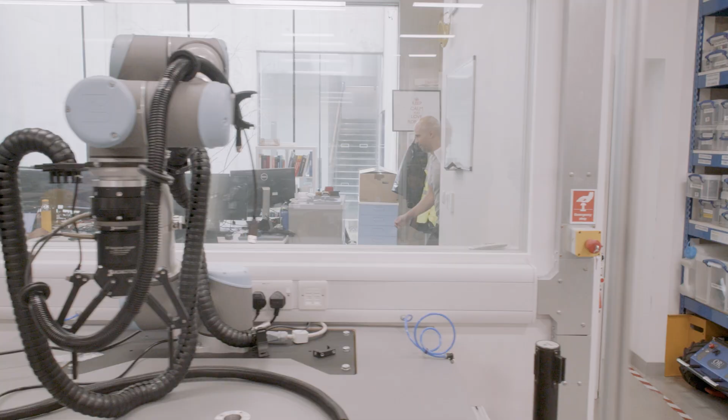Welcome to this next episode of Fire and Wire. I'm here on the Banbury Road. I've got this beautiful old building behind me, and you wouldn't believe it, despite its age, inside is the high-tech Robotics Institute.

We're going to go and find out a little bit more about what they've been doing to drive and make robots for good. This is the team which just recently won the Queen's Anniversary Prize for their brilliance in all things robotics. So let's go on in and find out a little bit more from the director of the Institute, Professor Nick Hawes.

Great to have you here. Oh, well, I'm absolutely thrilled. Thank you so much. We got lucky with the weather. Just about. And I know you've got a real treat for us in store.

So, Nick, maybe we could just kick off by telling a little bit about yourself and your background, and then your role here, and a little bit about the history of the Robotics Institute. Yeah, I'm a Professor of AI and Robotics in the Engineering Department. I'm also a tutorial fellow at Pembroke College, but I'm here as the Director of the Robotics Institute. The Institute was founded by Paul Newman and Ingmar Posner about seven years ago, building on their history.

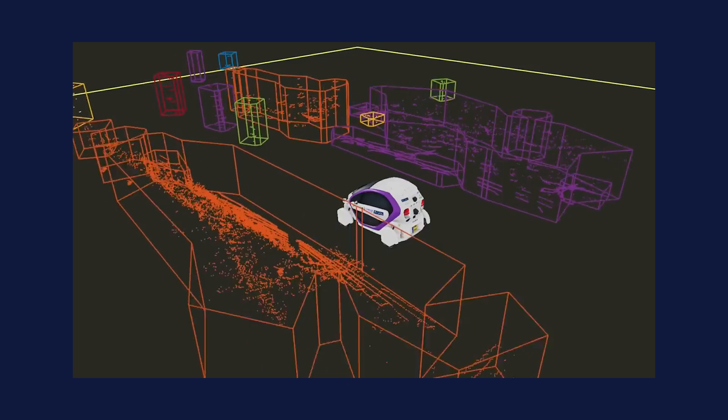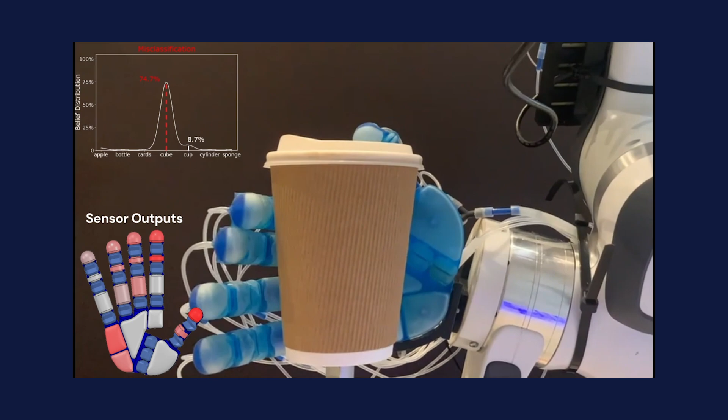The foundational work for autonomous driving, that was what Oxford was known for in the noughties, kind of 2010s. Then in 2017, the Robotics Institute was founded based on the back of the success of Ingmar and Paul. That's commercial now, that's gone off into Oxa, which is Paul and Ingmar's company. And now we do every other type of robot you can think of. We do legs, we do hands, we do wheels, we do a bit of drones, we do human-robot interaction, we do ethics. All of this is underpinned by artificial intelligence and engineering.

And it was for the breadth of it that you won the Queen's Anniversary Prize. So congrats once again. Thank you very much, it was awesome to go to Buckingham Palace that day. The whole Queen's Anniversary Prize system is looking for the societal impact of research. So whilst they awarded us for the quality of the research, they looked at the kind of impact we had on transport, on robotics in nuclear, on space, and increasingly on things like social care. These are areas where robotics can have a huge value, as well as just the sheer fun of playing with robots, which we all love.

I mean, that's what the best research is, isn't it? It's both excellent science, but fun as well. We all do it for the love. Yeah. Well, I think it's time we saw some robots. So here we go.

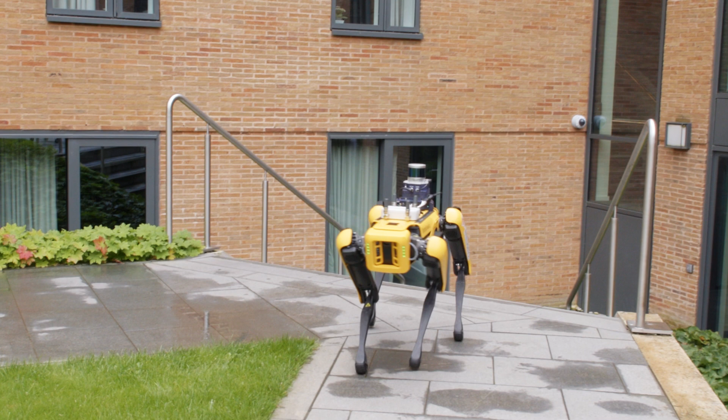You should hear the robot start to move. This is a Spot, it's a Boston Dynamics robot. One of the things we do here a lot is, you can hear it, we buy a lot of our robots and then use them as platforms to deploy artificial intelligence for decision making, perception, and then use them for applications.

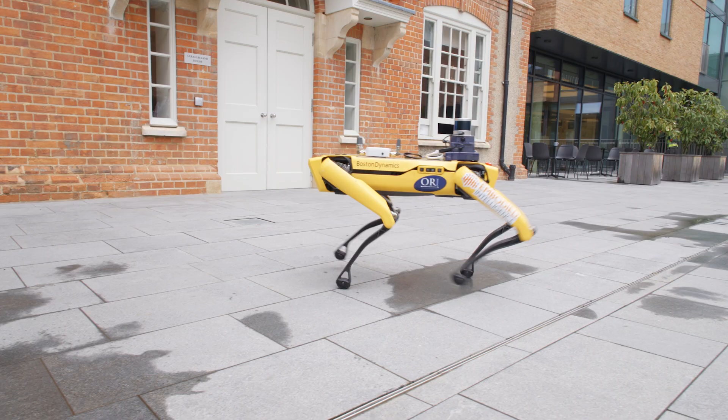And so here it's just doing an inspection action, pointing its cameras up to a target that we've proposed. I'm just going to get out of the way so you can see. Absolutely, let him come through. Yeah, him, I don't know why I'm saying it's... to not... him. We don't gender Spot robots. We shouldn't gender them.

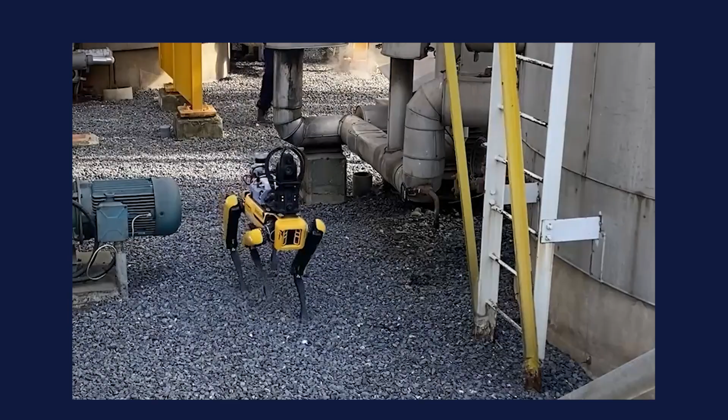We've been doing work with the UK Atomic Energy Authority to do inspections, so in areas where you want robots to be, but you don't want humans. Then these robots are excellent for that.

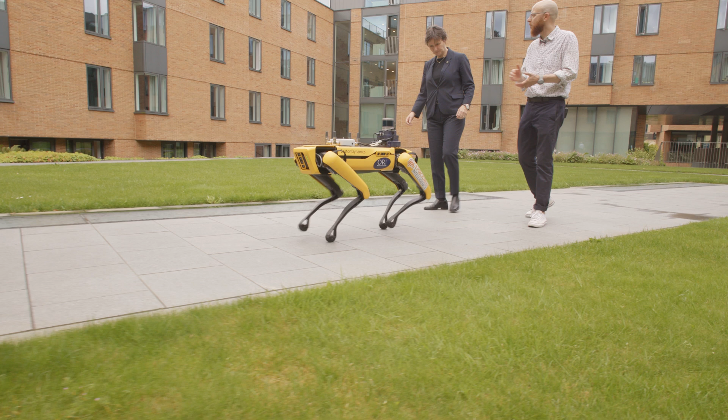Was it deliberately made for that low movement? I think it just gives it more flexibility. Yeah, I think it's just about, it gives it more control, more flexibility. So it can rise and... Yeah, so it can lift up higher, it can go down.

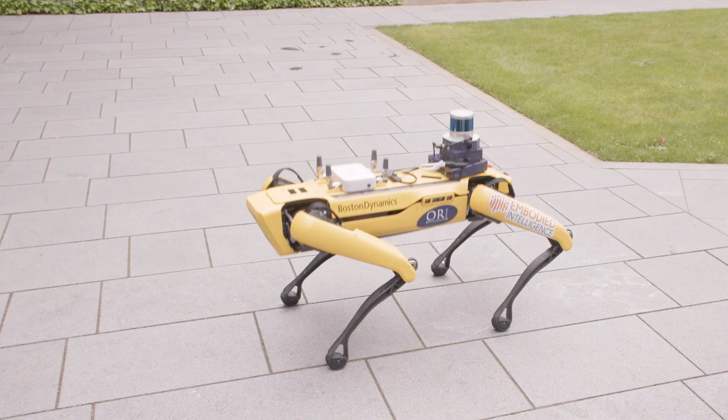We're deploying it under a nuclear reactor by the end of the year, where it's going to crawl through what's called a bioshield, a small tunnel. So it's going to be as low as possible, crawl through, then go up and inspect around the bottom of this reactor. Take pictures and everything, and build a 3D map that they're going to use as part of the decommissioning process.

It also saves money, so that decommissioning process, the mapping under this reactor, will cost over £1 million if you did it by hand, or with humans. But we can do it for tens or hundreds of thousands of pounds with the robot and the project. So when you see Spots at science fairs or at trade shows, you need to look at what's on the back.

If there's nothing on the back, then they've just used it for dancing - it's just a gimmick. But if they've got a payload, cameras, or LiDARs, then they're actually being used in reality. You can also see what weight it can take.

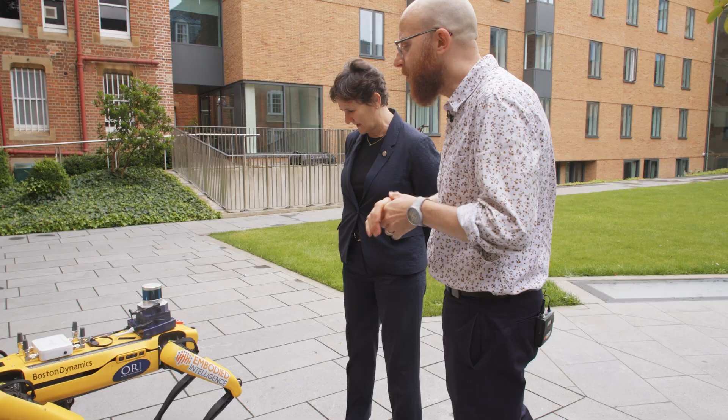I don't know, I couldn't sit on it. You couldn't sit on it? No, our risk assessment doesn't allow that - I've been in so much trouble. But you can also see the bumps and bruises where it slipped downstairs or turned over. They're really robust, fantastic.

Right, well, let's go on and see some more. Bye, Spot. You should get it to talk.

People behave completely differently when a robot speaks. It's really, really interesting. I think people react very differently.

This is down to the lab - you've got to tell me why you are calling it the Bat Lab. It's underground, like Batman's lab, and it's full of exciting technology. There's nothing too deep about it. So you're the Batman, and who's Robin? You can pick today. Okay, you can pick a Robin. Good, I will.

Oh hello everyone. Wow, oh my God, this really is like a bat cave. My colleague, Professor Irene Tracey. Yeah, I know Ingmar, of course. Professor, good to see you again. Thank you for letting me come and visit. Welcome to the ORI, welcome to our lab in the HB Allen Centre.

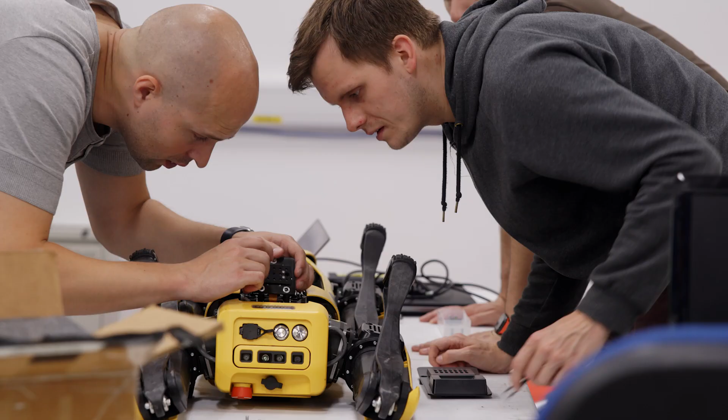In the ORI, most of the science we do is pulled through applications, and that's really important because it focuses our research. We're also very keen on engaging early with stakeholders, particularly in social care, because you don't want to be the guy who shows up with the autonomous pill dispenser that nobody needs. Turns out one of the key causes of hospitalization out of care homes is not drinking enough water, so one of the things we had in mind was to automate that system with some fairly basic robotic science. That was the birth of what we now call the Good Hydration Project.

This is one of those robots, one of the stretch robots manufactured by a company called Hello Robot. It's very basic - you don't see a face, you don't see anything human-like, because ultimately you're supposed to think of this as a tool, a functional tool. If you think about taking a large language model like ChatGPT, with vision input and so on, onto one of those robots, you want to interact with these robots with pure language.

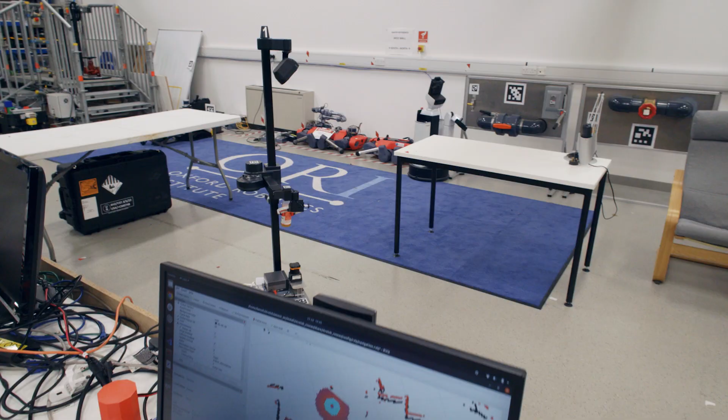Say I don't want an orange, I want an apple juice, for example. The language model knows about language, but it doesn't know anything about the robot workspace. So grounding all these things - like I want this bottle in the robot workspace - and also the robot embodiment, how to interact with it, is a pretty critical thing for us. We're hoping to get this into a care home in the next few months as a first trial.

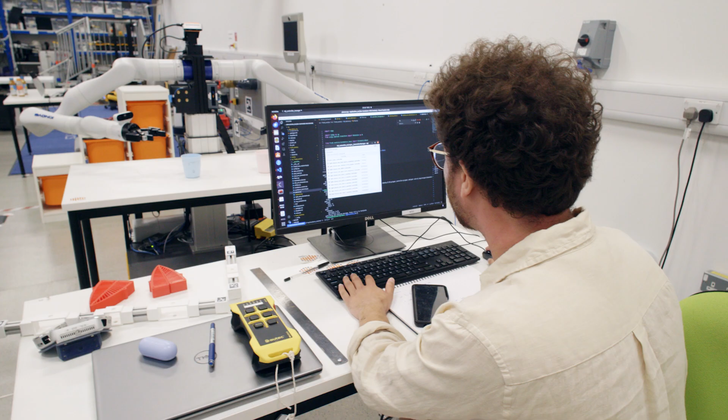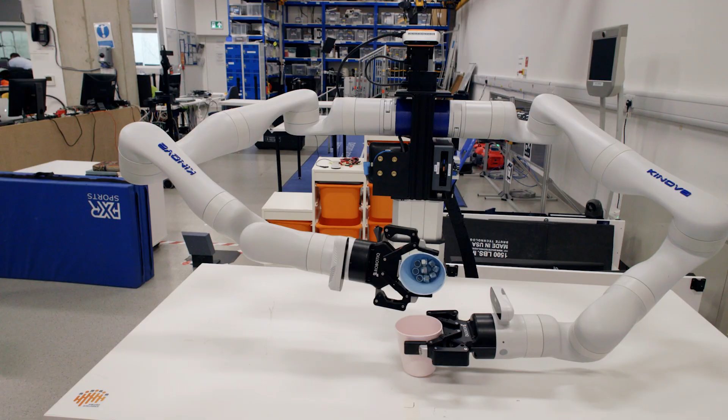I'll take you to this guy - this is Frank. Hello, Frank. Frank rolled out of a crate about 8 months ago, and we've been commissioning it ever since. This is the last stage of commissioning before we do the research bit. The idea for this is to really work on small batch manufacturing and assembly - there's a lot of work going on in the robotics community right now about manipulation and how we do that robustly.

This is Alex - hi Alex, good to meet you. Alex has done a lot of the integration for Frank and the software framework for it. We changed the controller, so rather than being very rigid like most manipulators, it's actually quite soft and pliable, so you can have a play and push different joints. If it was interacting with you, it's not going to harm you - it's very soft and compliant, not going to punch you in the face.

We'll do another thing as well, which is really cool - it actually understands a little bit about itself. So if we rerun this, it'll try to do a similar thing where it tries to pour from one hand to another.

But I can be a bit of a bully, you see, and it will try and react to it. So I can sort of move it around very gently. And the other one's chasing it.

Exactly. And then if you'd like to have a go yourself. I would love to have a go. Pull towards yourself. I will. Yeah. Oh yeah. And then this arm will gently follow you. And then if you bring it towards me again. Yeah, sorry, it's a bit... let me give you a... yeah.

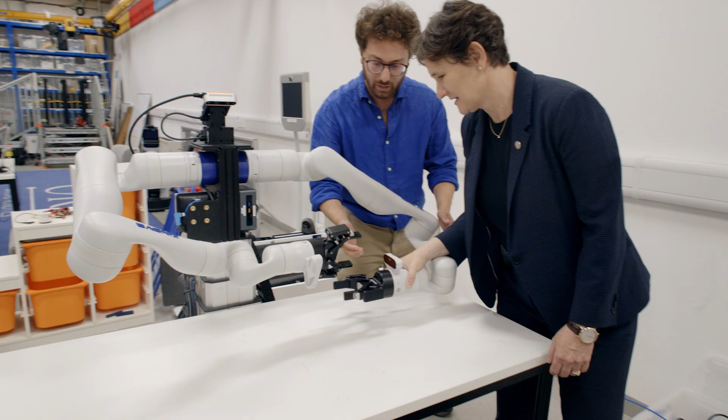Gosh. And you were saying you can show it doing some sort of more complex assembly. Yeah, I mean, that cup thing was pretty impressive, but let's have a look at what else it can do. Okay, sounds good.

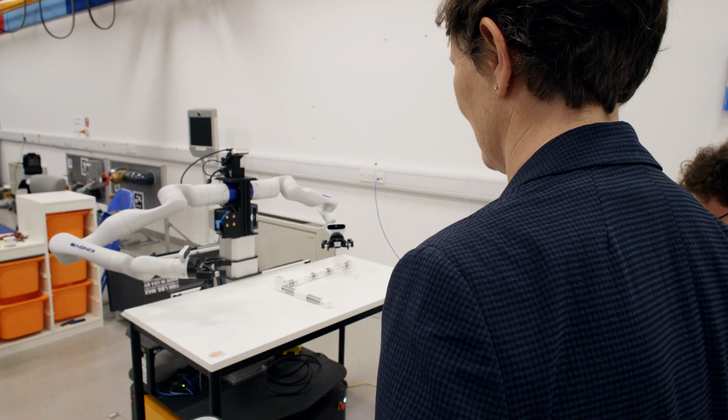A few seconds, sorry, bear with me. Okay, I've got every confidence in Frank. Here we go, right, let's just see how it goes to start with. Doing a very good job. Oh, I did it. Yeah, I did a great job. Sorry, now less surprised when it does that. You have no faith in Frank. You've got to trust Frank. Yeah, really, I should trust.

I was watching a documentary on agriculture, and they had this amazing robot going along picking strawberries with incredible precision. Frank's done well, but this looks like it wouldn't be as good as that robot at picking strawberries, but that's not the point. We tend to develop technology here that embeds into its workspace.

So, for example, if you have a particular product that you want to build today, and you only want to make a small number of that, hence the small batch part, you want to instruct your robot in a fairly natural, organic way in order to be able to give it new skills so it can do new things. That strawberry picker wouldn't be able to do anything else but pick strawberries, and a particular type of strawberry typically, and that's it.

Whereas this robot could be trained to do the strawberry, but it could also be trained to pick a pear or an apple, or build things. That's the difference. Yeah, and of course it's not tied to that robot. So if you happen to be a small batch manufacturer, or you do something in industrial assembly, you don't have to have bimanual Frank. It can be a single arm, it can be two arms, it can be more than that.

Right, okay. And so the question then is, of the principles, how can somebody who's not a roboticist go in and say, well, actually, I need to be able to do this quickly.

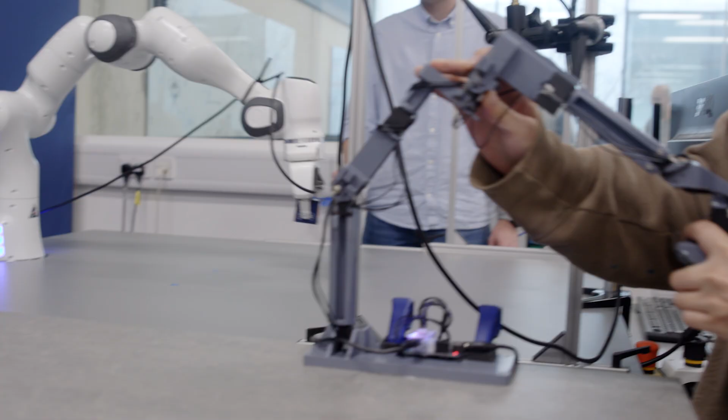Let me now introduce you to my colleague Perla Maiolino. Good to see you again. Good to see you again.

Yeah, I can see you've got a patient here in some pajamas. Yeah, what on earth is this all about?

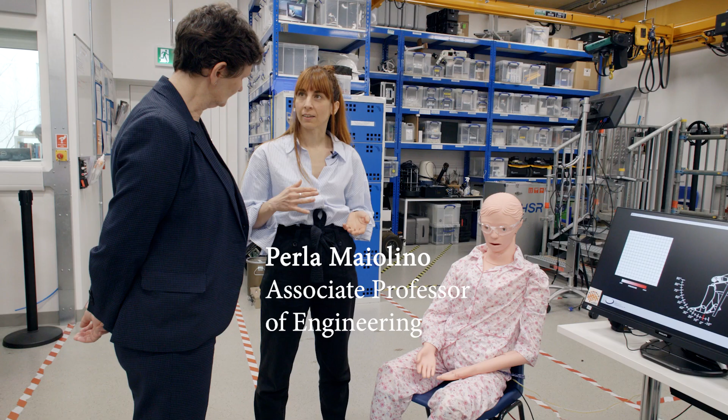My research is about soft robotics and tactile sensing to help occupational therapists train themselves. It's actually very difficult for them to understand how to touch a patient and also recognize their feedback. So what we're doing is actually creating a system that can be programmed to mimic different patient profiles, so they can...

For example, here there is all the skin, and there is also a point that indicates the most painful point where to apply pressure. And also, if you apply pressure here, you hear the sound. You need to touch like on the spot.

As a pain researcher, I'm very familiar with doing this. And you see the response, like, the color mapped to how much pressure you're applying.

So we can record all this information and process it at a later stage, so they can see how well they're performing at the operation. So it's very much to use sensory feedback.

And is this something they've identified that they need, in talking to the occupational therapists? They feel that this would be helpful for their training?

They expressed the need for systems such as this one, because usually they need to practice among themselves, and it's not easy. So you need a lot of years of practice to be able to master the technique. Also, there are aspects between functional and affective touch that are very, very important, because it's not easy to touch a patient properly and not surpass some boundaries of privacy.

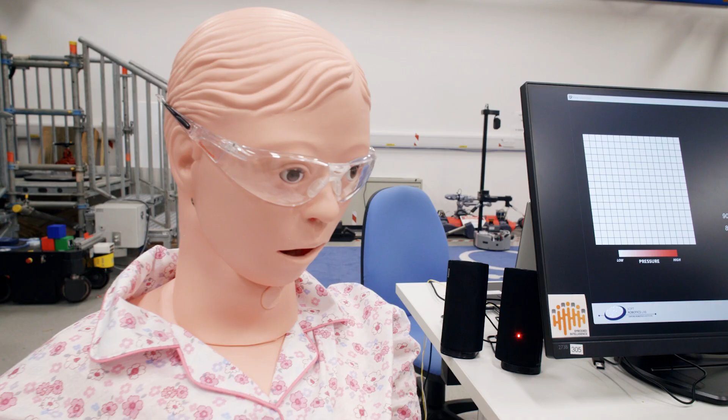Absolutely. Well, best of luck with the work. Thank you, Perla. Thank you so much. Thank you. It was nice to have you here. Let's go on to...

I work on one of the underpinning technologies of robotics, which is 3D mapping technology. Over the last number of years, we've developed a handheld device that you saw on the Spot robot earlier. I'll just talk a little bit about what it contains.

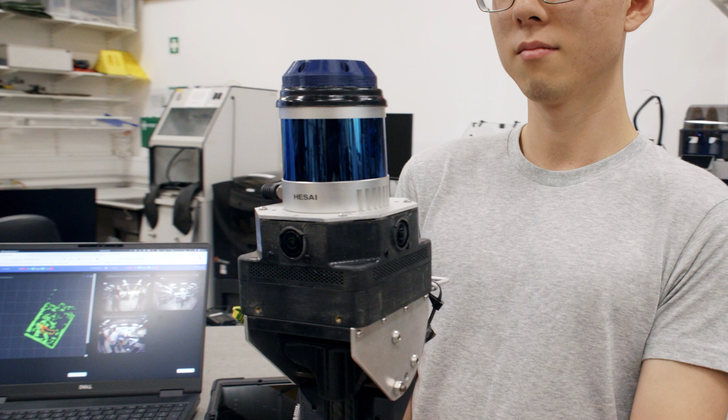So you can see here a prototype device. It's got 3 separate cameras attached to it, and a laser, the same type of laser that's on an automotive self-driving car, and some computers on board to build a 3D map of the environment. So it's spinning around and scanning, measuring a 3D reconstruction. The cameras are doing the pictures and the laser's picking up the geometry.

Exactly. Great. Okay. And we can use that as a basis for navigation on a variety of robots, aerial robots, underground exploring robots, the Spot that we saw earlier.

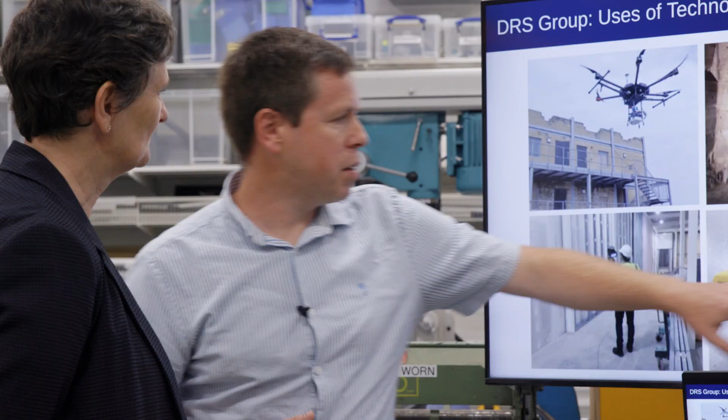This was actually a project where we were mapping diversity and growth in forest environments. So you can see here the robot exploring in the forest environment, building up a 3D map, identifying each individual tree, measuring its radius and its volume. And you can see here a reconstruction of each tree, how big they are and their exact positions, this kind of thing. That's fantastic.

Wonderful. That's amazing. I can see the use more and more for sustainability, conservation monitoring, agri-tech. Who are your main customers? Is it construction? Construction companies, and then maybe more specifically companies that wanted to do this regularly or very quickly. Architects who are doing bidding for jobs want to have a more detailed model. They don't use very much technology in this sector.

One of the things I was really keen to hear is how many spin-outs are coming out of this. So I'm really thrilled to hear this, and nice to see that you celebrate success as well. It's important to have a fine team.

And thanks for sharing your time here. Thanks for your time. Right, okay, ready? Thank you very much.

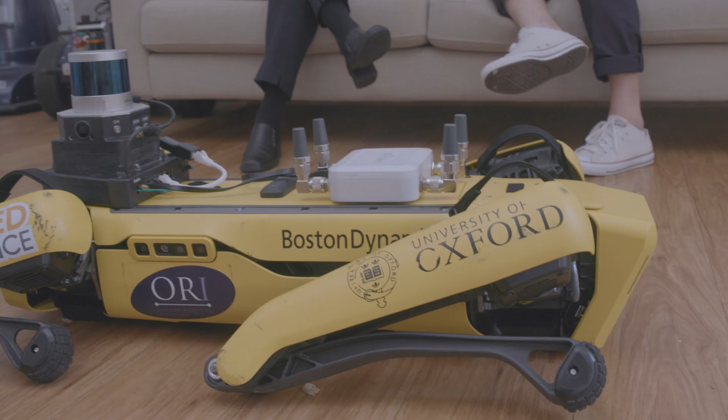Well, Nick, I can't thank you enough. That's just been mind-blowing, not just the breadth of what you're doing, but the quality and depth of the research underpinning it. I love your philosophy about the Institute being really focused on robots for good and what it can do for society. But I'd love to hear what your vision is going forward, with the Institute and where you see the new barriers that you want to break.

The vision of the future, as you said, is robots for good, for impact on society. And not just robots, but the underpinning technology - the artificial intelligence, the control, the mapping, all of these things, we contribute to robots, but we also could contribute to a model of the planet. For example, as you map the planet, you could build a digital twin of a forest, or a digital twin of the ocean, and you need to feed those things with data, which you can use robots for.

We want to use these robots to augment and amplify human capability. We're looking at things like mine clearance or unexploded ordnance detection. We've got a project with the Halo Trust just starting off. Well, that's such an important charity, their work on landmines, and it's just somewhere where robots are kind of perfect. Whilst they use some technology, the ability to scale and get people out of harm's way is great.

We've got a new CDT in robotics and AI for net zero, so that's with Manchester and Glasgow. And so we're looking really at how we can accelerate the green revolution and sustainable power using robots to decarbonise the life cycle of all sorts of energy assets. So there's lots of areas like that we're looking at.

Space, you haven't mentioned so much, space or the robotics and things, because obviously we've got a huge astrophysics department here, and we've got a sub-department of physics, and we've got the atmospheric and planetary physics department. So no, absolutely.

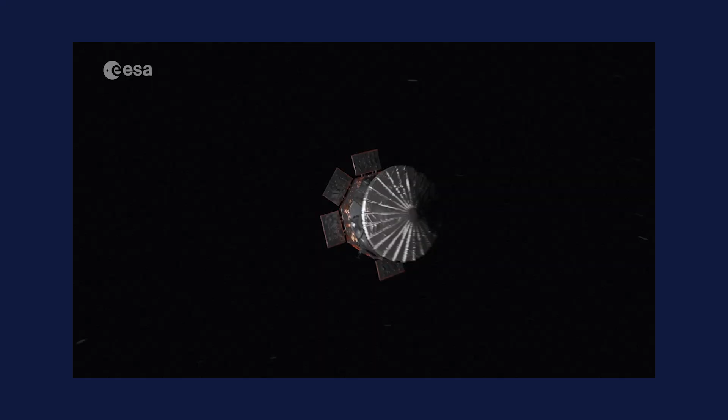Space is a real driver for autonomy because of communication delays, even if you're in orbit, on the moon, or on Mars. You can't remote control a robot there, so you need autonomy and general purpose capability, not just specialized tasks like picking strawberries. We need a robot that can do anything if we're going to explore other planets. Some of the work Paul and Ingmar did in the early days is actually flying on the ExoMars mission on the Rosalind Franklin rover. Some of the visual odometry used on the cars is now being used in space.

In terms of underwater, some of the decision-making that you saw on Spot at the beginning, we're putting those algorithms from my group onto underwater gliders. Instead of long-term monitoring outside spaces like construction sites or quads, we're trying to long-term monitor the ocean and use autonomy to drive the gliders to sample bits of the ocean where the climate or forecast models are bad.

Are you getting enough people coming through with STEM backgrounds to support your ambition?

The huge hype around artificial intelligence at the moment is both good and bad. We do a lot of AI in this institute, and the excitement around that new technology is great, but I'm missing that robotics is a key element of it. If you ever want an AI system to affect the world, pick up some waste, help a human out of their chair, you need the robotics. There's an element where if you're doing something purely computational, it's kind of easy - you can pick up a data set, some algorithms, go through tutorials online, do that on a laptop in your bedroom. Working with robots is a much slower process. I think the output is so valuable, and the excitement when your robot moves, when you see those things move, when your code drives that robot, it's incredible.

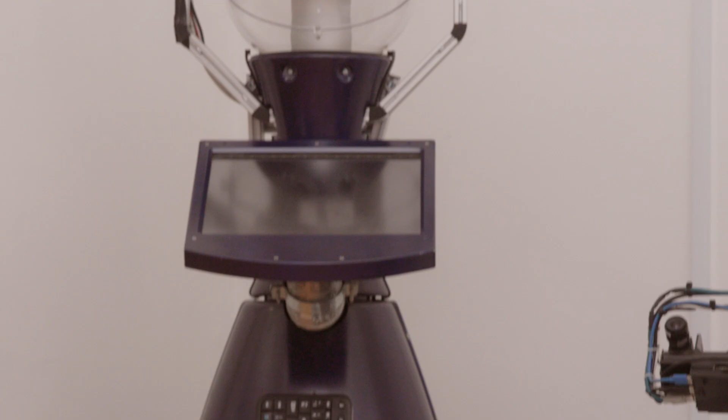Well, people are scared too. There are some ethical challenges. I think what we've learned from the field trials and deployments we've done - for example, there's a robot behind you called Betty. We used Betty in hospitals, care homes, and office settings for 3-4 months at a time, and we did social science studies as well as artificial intelligence. Those studies showed us that if people understood why the robot was there, and understood how it was doing what it was doing in a fairly conceptual way, that really increased acceptance. People were not comfortable if robots just appeared in their workplace without an understanding of their purpose. So I think that's part of the answer - these robots should add value to whatever you're doing, and if you don't see that, then the place you're in or the people you're working with are not communicating it clearly. Automation needs to be done sensitively.

Society is getting more comfortable. You think about Siri, you think about Alexa - we're by stealth getting society comfortable living alongside robots, or automation if you like. So that probably will help in terms of acceptance and tolerance. The idea that you can talk to a consumer electronic device and it does something useful for you is now embedded - my kids do it, my mum does it. That's definitely part of it, but connecting that to the physical world is so much harder. Really seeing these things in our home, it will happen, but we're still a long way off, I think.

Well, it's been a real treat. I can't thank you enough for giving us so much time, and to your whole team, to let me come and see this. I'm really buzzed and energised about what's possible, but it's been a real thrill to come over and visit - best of luck and congratulations again. Thanks, Nick.